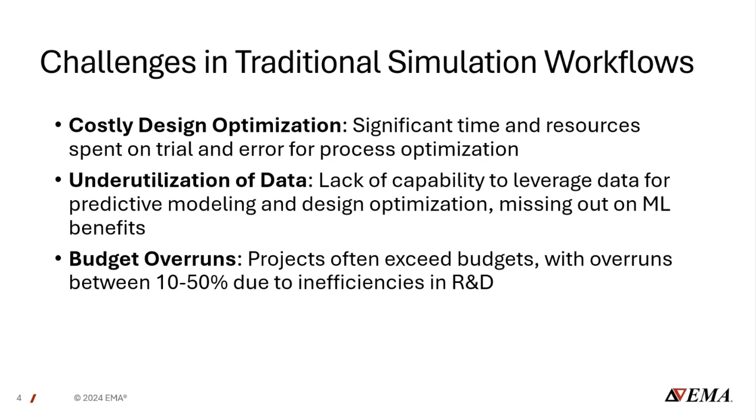So why machine learning with electromagnetics? Well, traditional simulations are time-intensive and costly, as all of y'all are aware of. And what machine learning can do is allow us to run these simulations in seconds, enabling rapid iteration and design exploration. And it can go farther than that. You can integrate real data from your product as well, integrate low fidelity and high fidelity simulation data, and build a model through the life cycle of your entire product.

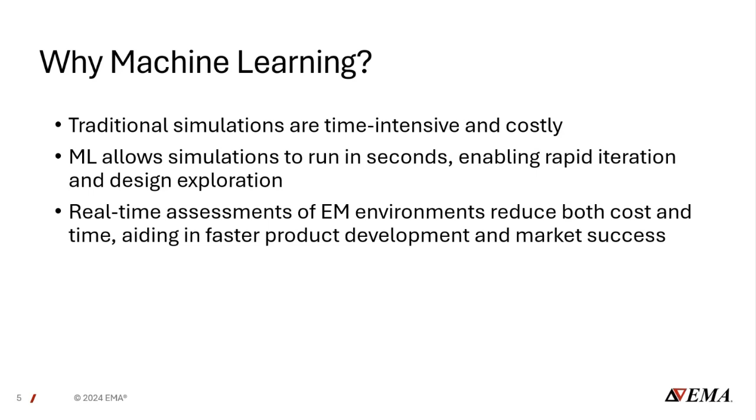And what it also allows you to do is have real-time assessment. So since simulations are so costly and they can take hours or even weeks to run, doing inference on a model can take less than a second to minutes to predict exactly what a numerical solver would take hours or weeks to do.

So the key components of EMA3D Connect: the first thing is we need to generate the data, right? And so the unique position that EMA is in is all of the machine learning that we're doing right now is with simulation data, and we have numerical solvers, so we can generate that data. So then once we have that data generated, we need to understand how to process the data in order to put it into the machine learning model.

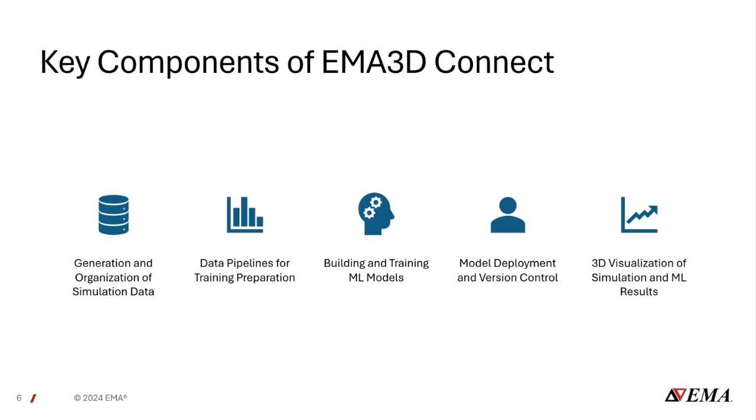And while we're doing that, we build and train the models. And once we have the models trained, we'll do the deployment and the version control, and then actually being able to visualize the results, whether it's from traditional numerical simulation or from the machine learning models that we built.

So what is a surrogate model? Really, a surrogate model is a data-driven model to predict your simulation results, right? So it's the machine learning model that's trying to emulate the behavior of your numerical simulation. Surrogate model is kind of a new word, but it's been done lots of times with sensitivity analysis and reduced order models. But really what the modern surrogate models are doing is implementing deep learning into the ways of being able to analyze these models.

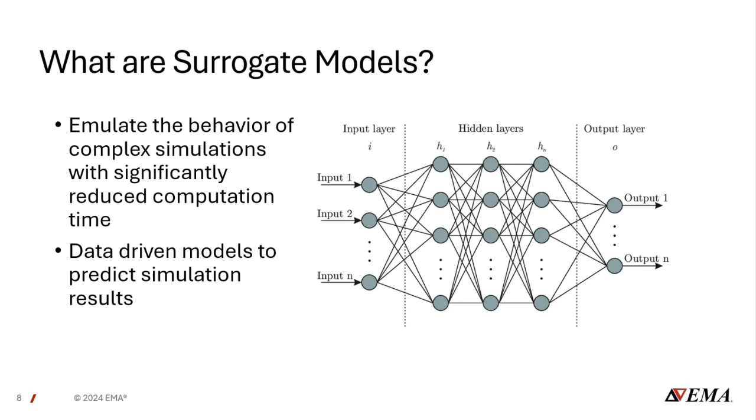So what we've been working on is building a surrogate model for shielding effectiveness. What this model does is it predicts the shielding effectiveness given an EMC Plus configuration file. And it enables order of magnitude speedup, so you can input your EMC Plus configuration file, you can click run, and in less than a second you have the results for a given electrical enclosure. Now in this study we focus on shielding effectiveness, but these concepts can be applied to radiated emissions and radiated susceptibility as well.

So here's the model architecture for it. I won't get too much into the details of this. If you're more interested in the nuances and all the details of the architecture, feel free to reach out, and I have some supplemental material I can give you.

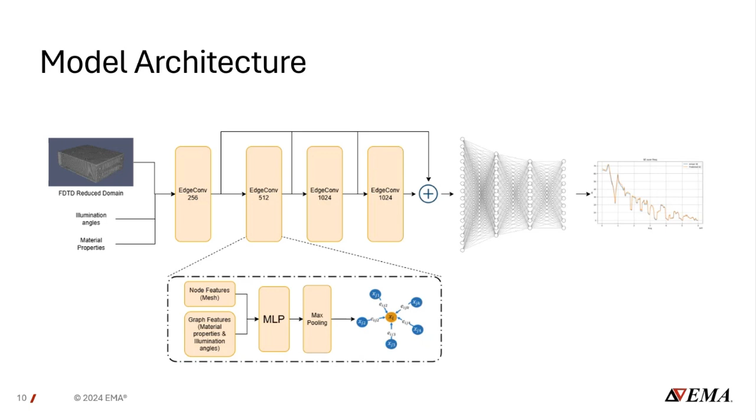But at a high level, the way it works is we take the finite difference time domain, we reduce it to encompass just the mesh of your enclosure. It incorporates the illumination angle and the material properties, and then it goes through layers of a graph neural network and eventually through a fully connected network to predict your shielding effectiveness over a range of frequencies.

So the model input for this is, like I said, it's the FDTD domain where it's just the voxels of where the material is defined. And so you can see in these pictures here, this is in ANSYS Discovery, so you can set up your simulation in ANSYS Discovery, generate your configuration file, and you won't really see this point cloud, but kind of under the hood, what's happening is in the pre-processing steps, we're generating this point cloud to eventually be able to get it into a format and into a graph representation that the machine learning model can ingest and utilize GPU acceleration.

And so what we do with this mesh is from the top to the bottom, there'll be different amount of points in the resulting point cloud depending on your enclosure that you do. So we subsample to a constant amount of points, and then to incorporate artificial edges into this point cloud, we do a k-nearest neighbors algorithm based on the Euclidean distance of the points.

And we also encapsulate the illumination angles and material properties from this configuration file. And these properties are incorporated as global level features, right? So the point clouds you can consider as nodes on a graph, whereas the illumination angles and the material property is graph level features or global level features. And so that's some of the challenges here, was incorporating different, you could call them features, to be able to make accurate predictions.

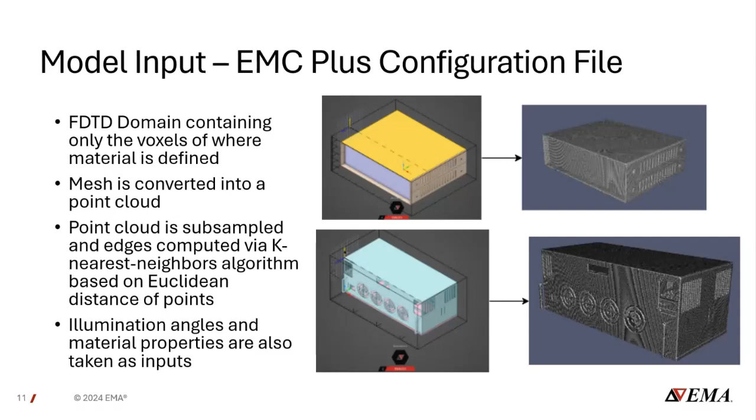So a little bit more information on how this works. So a lot of times when you set up these simulations, to be able to resolve different aperture sizes, you'll have different cell sizes in your simulation, which results in different frequencies that you can resolve. So the way that we handle this is we store as metadata into each training sample the maximum resolvable frequency that the specific simulation can do, and the model is trained over the largest frequency in the data set. So let's call it maybe 13 gigahertz.

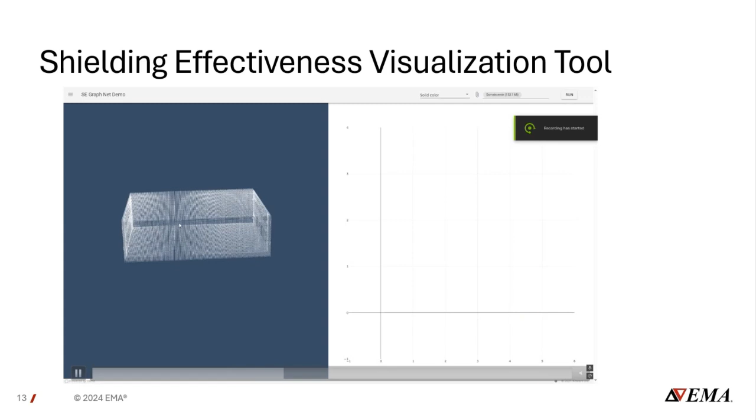So once we have the model trained, how do you deploy this model, right? So there's a number of ways you could do this. So what we've done here is we've created a demo application that allows you to run inference on your model. So what you can see here is you can upload your EMC Plus configuration file. It shows you the point cloud, and then you can click run, and within less than a second, you get the shielding effectiveness results.

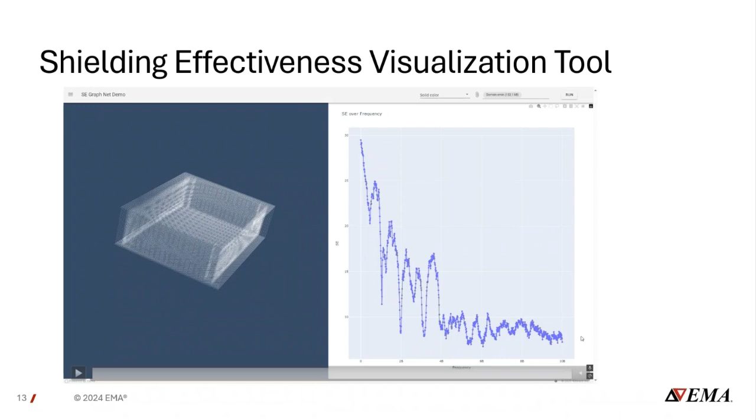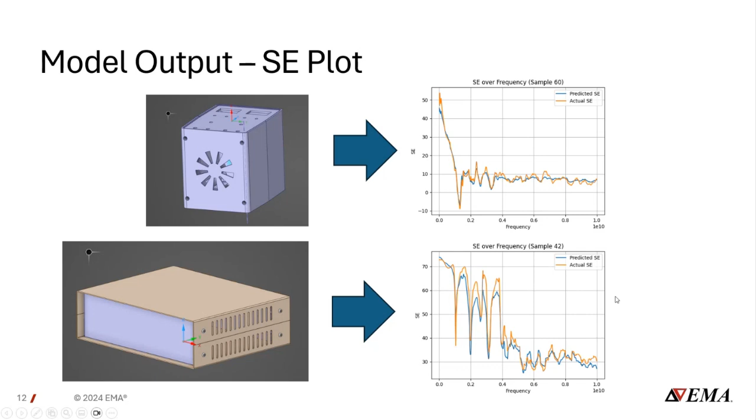This point cloud you see here is actually this bottom electrical enclosure with the exact same configuration and illumination angles and material properties you see on the plot sample 42 here. So this is just a demo app. It runs through a web UI, and it's deployed through a Docker container, so you can deploy it. But that's just one way you could do it. There's lots of different ways we can help you deploy and visualize not just machine learning, but also your simulation results.

So a little bit into the end-to-end framework. So really the hardest part of generating these is not just coming up with the model architecture, but being able to generate the data and understanding the data, right? So we've kind of created a framework that involves data. Then once you have your data, you do the training. Once you have the training, you do the deployment. And then ultimately, you need a way to visualize the results, which you can do through UI, through the current ANSYS Discovery tool, or through ParaView, or NVIDIA Omniverse. So we've kind of built this framework to accommodate numerous requirements for customers.

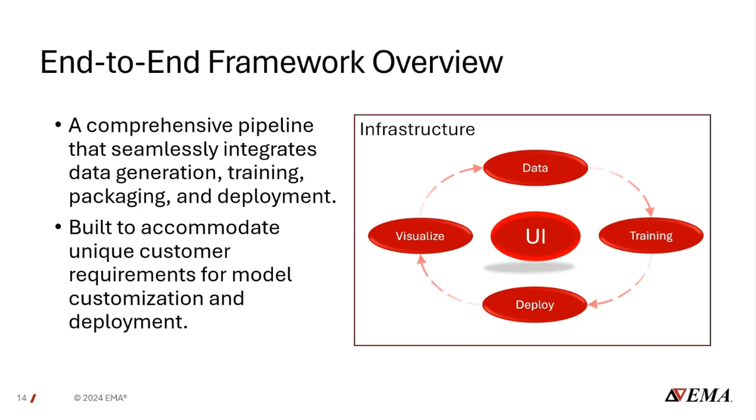So a little bit into generating the simulation data. The way that we do this is we use ANSYS Discovery and the Charge Plus APIs and EMC Plus APIs to generate different combinations of the model, right? So we'll change varying illumination angles, we'll change size of apertures, the width, length, and height of the box. We'll go and grab different types of enclosures, and we have an API script that allows us to generate the

EMC Plus configuration files. So once we have this and we have a good distribution of configuration files, we queue this into EMA's cluster using a workload manager. And so what this allows us to do is queue up our simulations and just let them run on the cluster until we have the data generated.

And while we're generating this data, really the important part is understanding how your data lives in terms of what's the structure of your data, so you can decide how you should build the pre-processing and how you should build inductive bias into these models in order to create something that generalizes well.

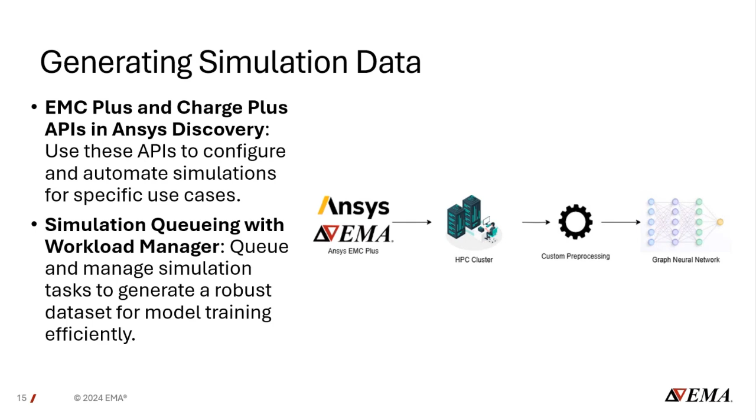So this is a picture that I think is really helpful, and it's called the 5Gs of geometric deep learning. And it's a framework that I use to decide what type of model architectures to use based off of the data and the data symmetries that the data possesses.

So in our case, for the shielding effectiveness model I showed you, we eventually put it into a graph representation, right? And the symmetry a graph representation has is permutation invariance. So in the model architecture, you need to do permutation invariant operations. And that's really the crux of a graph neural network. And it allows us to make better predictions with less data.

Now, when we started this, we started with a grid representation because naturally a finite difference time domain sits on a grid. Well, there are challenges, I won't get into it too much, with the curse of dimensionality, where if you try to incorporate everything into a grid, the size of the input just becomes exponentially large.

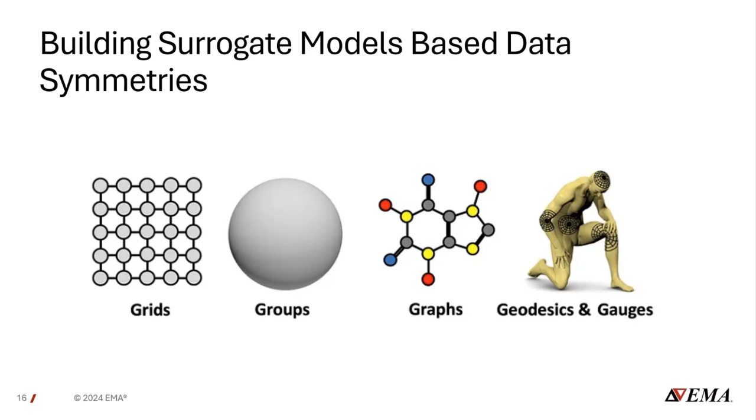A little bit more into the pre-processing. So the framework we've created here is pre-processing that doesn't work just for training, but also works for the production environment. So the pre-processing is in a single source of truth, where if you want to add an additional feature, for example, in the shielding effectiveness, we have the illumination angle, we have the material property, but maybe there's some other feature, maybe eventually incorporating seams as edge features into these models to encapsulate that as well for a more complicated model.

You can change the way that you pre-process your data to turn it from the EMC Plus configuration file to a point cloud, eventually into matrices of numbers, which is an adjacency matrix that allows us to represent a graph and do GPU accelerated learning on these models. Yeah, so I think this is a really important part, because if you don't have the pre-processing in place, it can make everything challenging and messy to deal with.

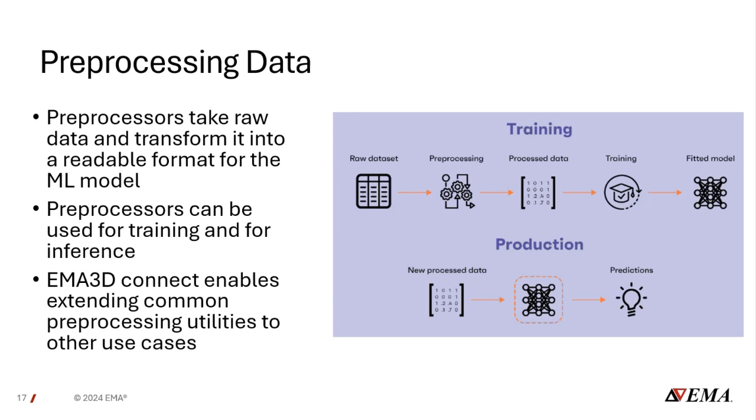So once we have these models trained and deployed, you can package them up in different ways, right? Right now we support a couple deployment options, but we're not constrained to this. I think being able to Dockerize and containerize the model or the application is easy, because it packages all of the dependencies that you need to make the model work. So all you have to do is run the container image to be able to do inference on these models.

And another part of this is, once you train the model, it's not just a one and done, right? You're going to be using this, you're going to be generating more data, doing more simulations. So it's a feedback loop, right? So there'll be multiple versions of these models. So we need some sort of model registry to version, deploy, and test them.

And so we can support that as well, being able to train the model for you. And then once we have additional data, we can fine tune it on the new data and then push the new version. And you can simply just pull the new model from the model registry and use it.

And another thing too is we support hybrid cloud. So you can deploy this on the cloud, or you can deploy it on-prem on a local Kubernetes cluster, on bare metal, on something like NVIDIA Triton Inference Server. So there's lots of different options that you can use to deploy these models.

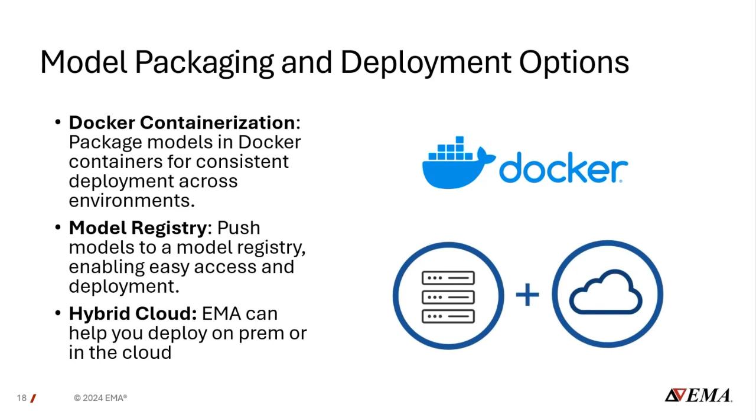So one thing that we try to stick to is the input and the output of these models are always representative of the way that our EMC Plus and Charge Plus generate the data as well. So we try to keep it in a similar format. So whether you're using the machine learning or you're using EMC Plus or Charge Plus, the way that you can visualize the results is the same.

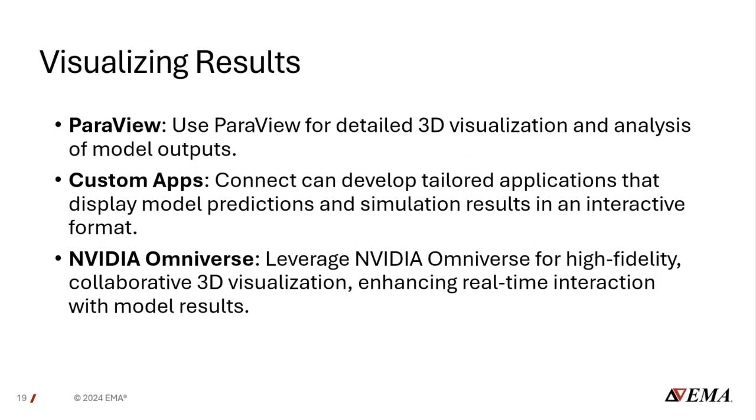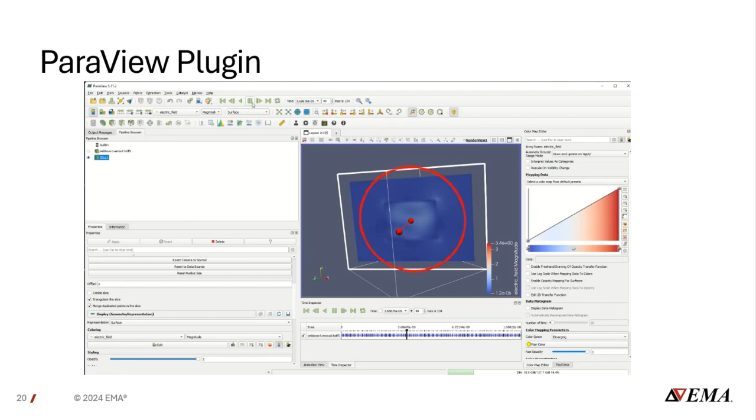So here's our ParaView plugin. You can see for this example, it is an HDF5 file, which is just the 3D probe. It allows you to just upload the HDF5 file, and then the ParaView plugin will recognize that it is an HDF5 file and ask you if you want to use the EMA3D plugin to render it. Once you have it in, it lazy loads the time steps. So it doesn't load them all into memory. So you can upload massive HDF5 files for 3D visualizations here.

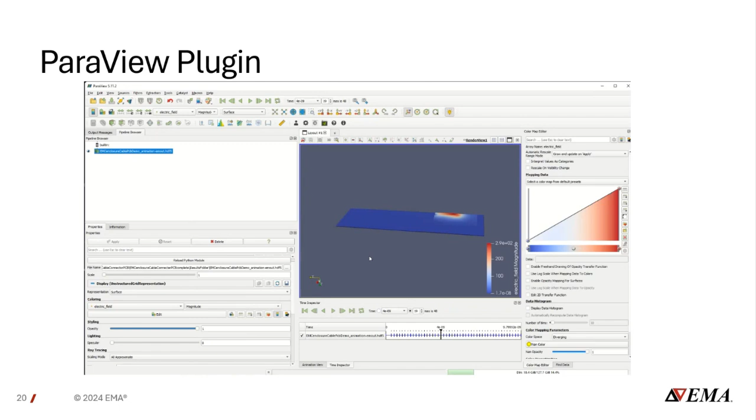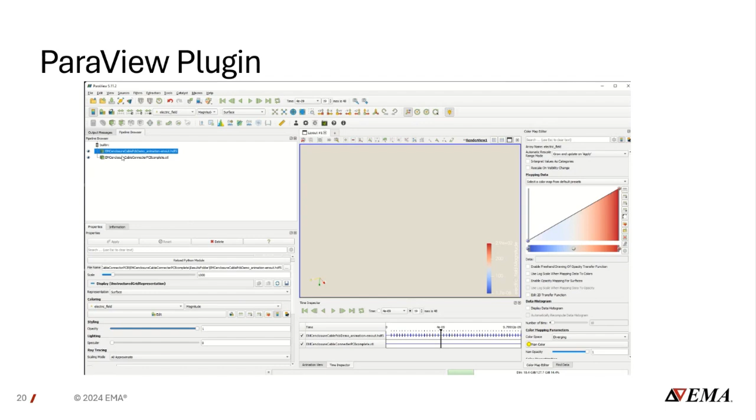And what you can also do is upload any sort of CAD files that you might have and overlay it, and you can scale the HDF5 file to fit the geometry as well. And we don't just support the 3D probe, we also support bulk data probes and other types of simulation results from EMC Plus and Charge Plus here. And so you can see here, I'm uploading an STL file with the simulation results, and this was a radiated emissions demo that we have here. You can see now we have the 3D results.

You can scale it how you want, analyze the results, and I think the real power of this is the filters that you get with ParaView are very, very powerful. So it allows you to import the results from our solvers and utilize the decades of work that has gone into building the algorithms behind filtering and post-processing of your simulation results.

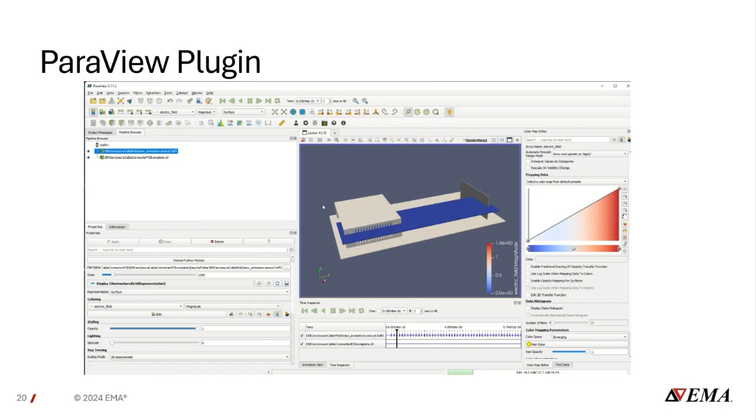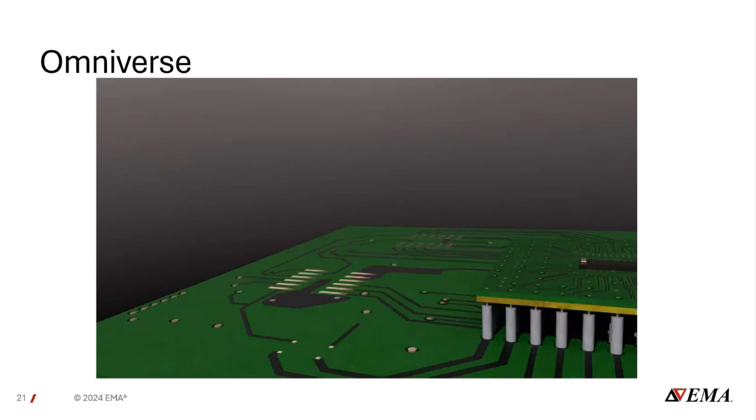So here is an Omniverse demo. So this is an ESD demo here. So what we do here is we do all of our post-processing in ParaView, and then we have a ParaView Omniverse connector. And once we have it in Omniverse, it allows you to do these photorealistic renderings here.

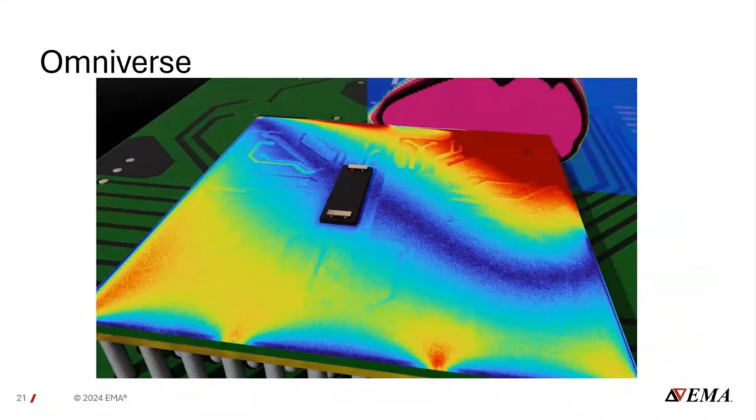So yeah, that's how EMA3D is implementing machine learning into numerical simulation. And I think as we develop these, this can really enable faster evolution of design and enable us to explore a more complex design space than traditional reduced order modeling gives you. The machine learning model will be able to find features that were otherwise impossible to really capture in traditional reduced order models.

Like I said, this case study uses shielding effectiveness, but this approach can also be designed to work with radiated emissions or radiated susceptibility. So yeah, EMA3D can build similar models for your products and designs.